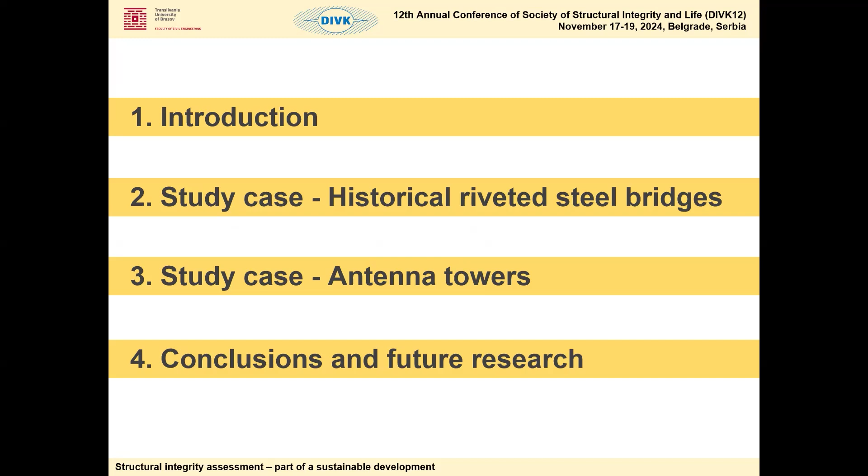First, I will present a very short introduction with some elements regarding sustainability, some cases of damages, especially for bridges, and then two study cases where I will underline the algorithm that I will be presenting, and in the end, some conclusions and further research.

As the definition of sustainable development given by the United Nations report from 1987 states, sustainable development is an approach to growth and human development that aims to meet the needs of the present without compromising the ability of future generations to meet their own needs. So it's very important to understand that we need this sustainable approach, taking into account three elements.

So again, it's about control. You need to have the environmental aspect, the economic, and the social aspects together, put into one sustainable development.

Some researchers will consider that sustainable development is an oxymoron, like it's not sustainable, since any development should not be sustainable by its nature. So it cannot be sustainable.

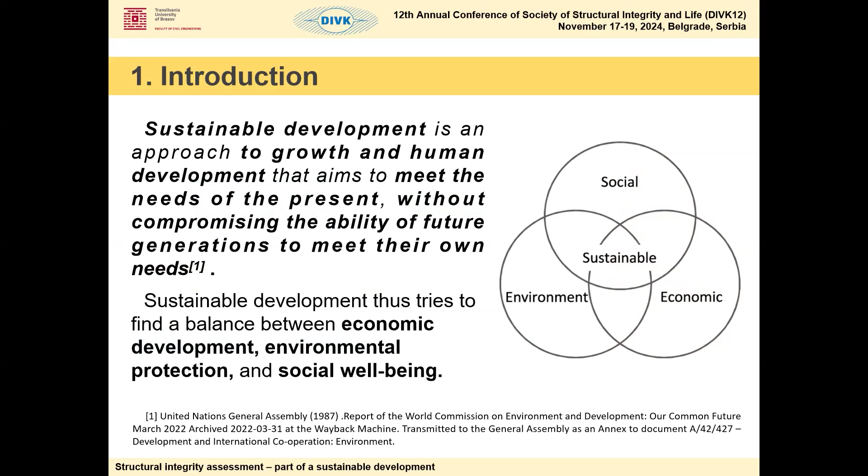But again, I will emphasize why we need this approach in civil engineering especially. So, taking the existing structures, we need to assess the reliability of these structures in order to see if we can reuse them, or if not, we can adopt the demolition solution.

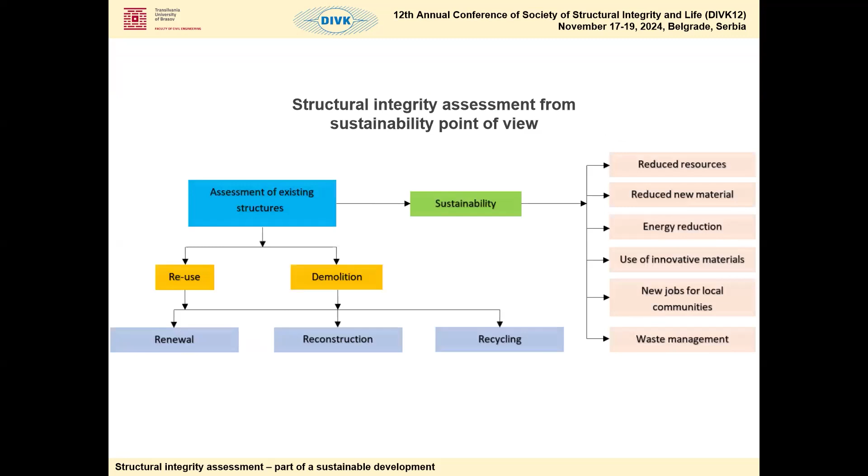Of course, in the end, we also have the renewal aspect - sorry, the reconstruction and then recycling. I think I will pass to the next part.

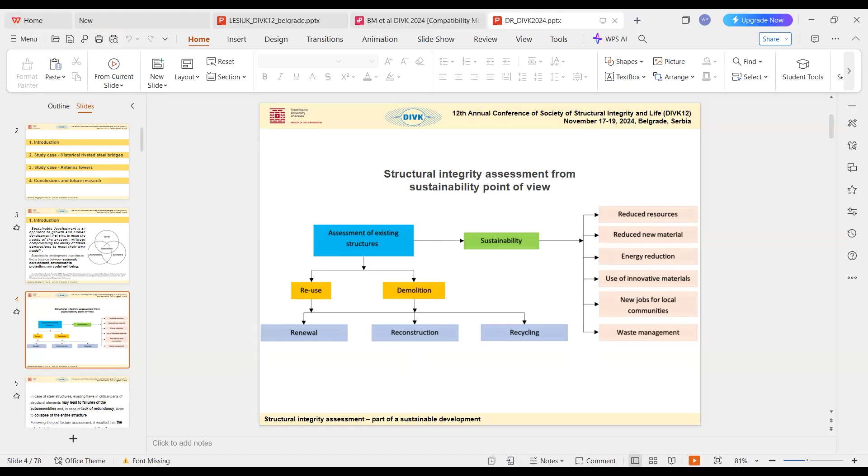Sorry, I think it's a problem. I will put it the PDF. This is better. Sorry for interrupting. Confidential? No, it's not confidential. You go here and it will go to the system. Perfect. Thank you. Okay, so we are here.

Okay, sorry for interrupting. As I mentioned, we need to consider this aspect of sustainability. So we need to assess the structures in order to see if they are reliable, and we need an approach given by fracture mechanics.

So we need to do an engineering critical assessment of the existing structures, and we need to find an algorithm that we can use with existing structures. First, and secondly, why not consider from the designing phase the possible implications of flaws that might be discovered in the future through visual inspection of the structure? We'll see why I'm considering this aspect.

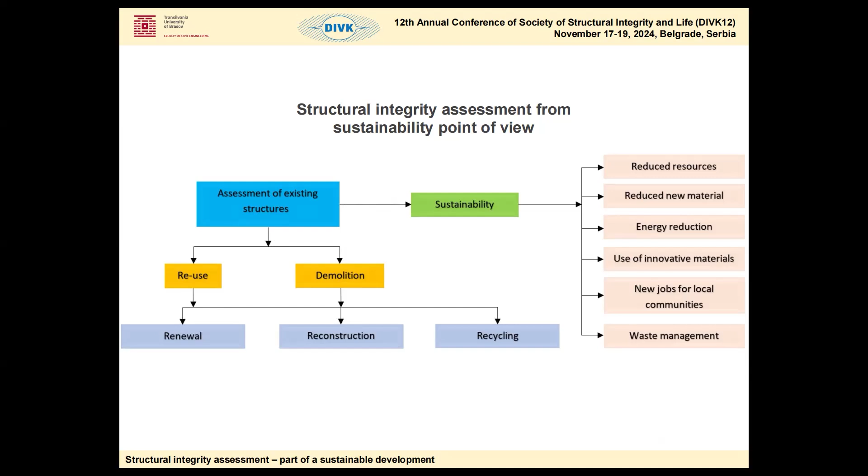So we need to assess this. Some examples of structures that have failed due to lack of inspection, especially corrosion problems.

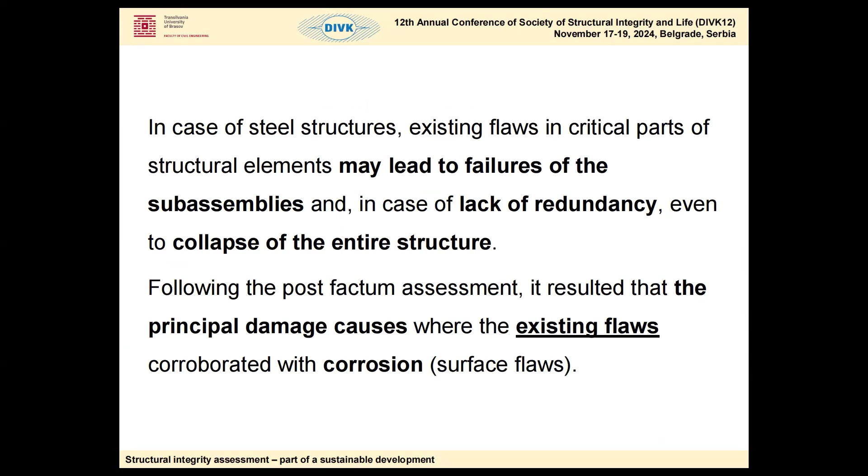Some examples here - it was not working, the PDF version. So we have an example of the Minneapolis bridge over the Mississippi River, collapsed August 1st, 2007. The main principal cause was poor maintenance and the problem of structural integrity of the support of the piers. As we can see, there are some indications of possible causes - the joints were under-designed.

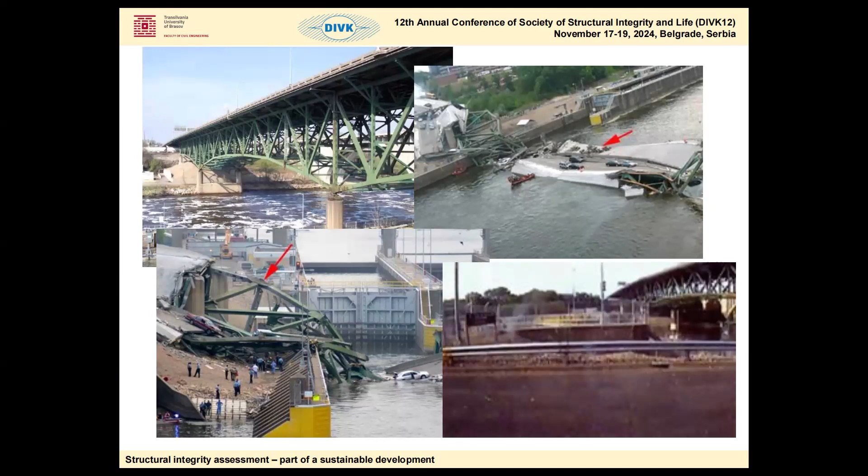Another example, the Nanfang'ao Bridge from Taiwan, a 140 meter span bridge. Again, lack of maintenance, lack of inspection. The tension rods were corroded and the bridge collapsed. We are talking about a 20-year-old bridge, collapsed in 2019.

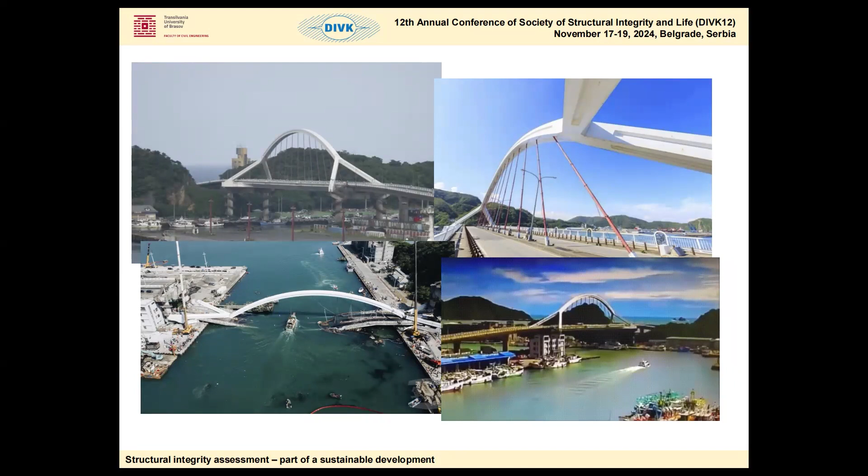It happened in 2019, so it was a 20-year-old bridge. And another example, some wind farms, wind turbines from Germany, 2017, again collapsed due to the crack and the buckling of the entire structure.

So we can see that we are having a lot of low cycle and high cycle fatigue structures that are damaged due to the problem of bad maintenance, especially, and lack of inspection.

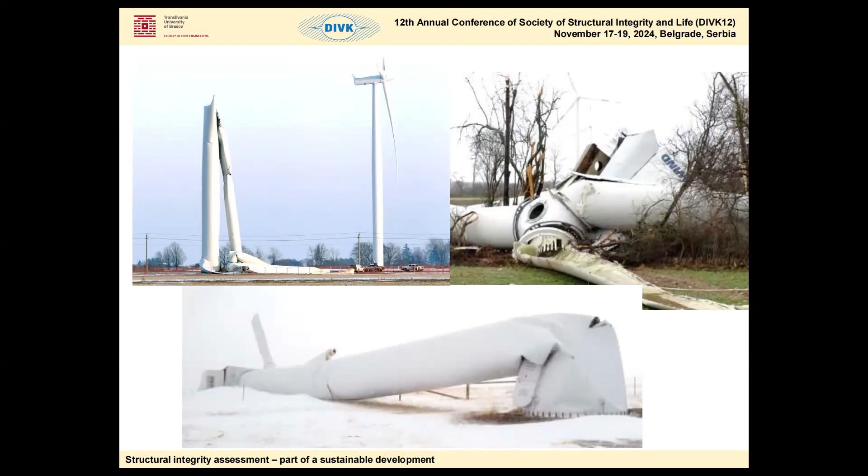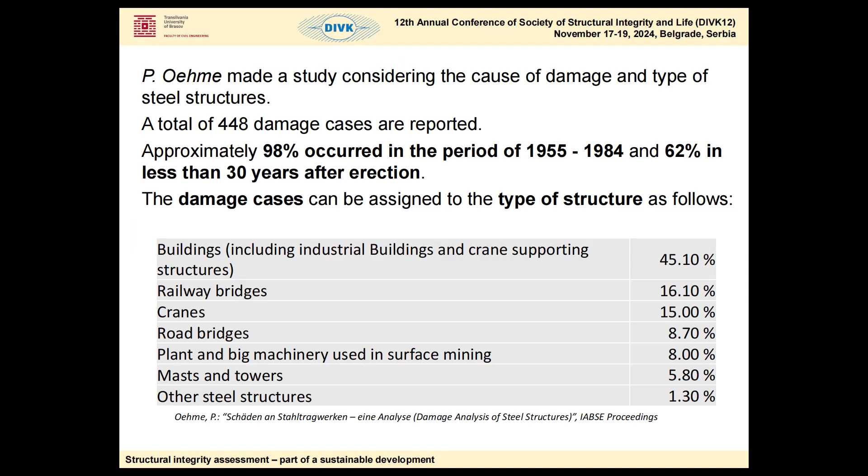This leads to the collapse. So Peter Oehme, a professor from Dresden University, made some kind of report of damages of structures, and he documented over 400 cases. In the end, he reached the conclusion that fatigue is the third in place from causing the damage, the collapsing of the structure.

As one can see, in case of bridges, it is the first in place to be the damage cause of the structure. So bridges, I will give also some examples about these structures.

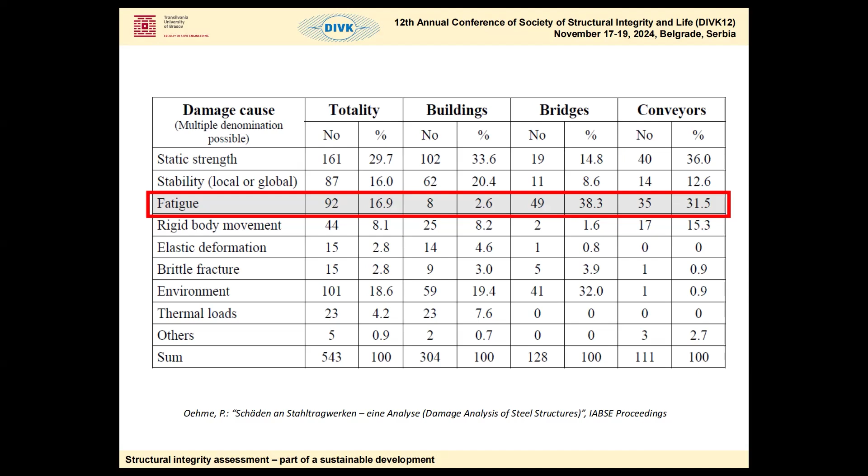So we will need to think of a solution, very simple to be applied by civil engineers. Civil engineers are not mechanical engineers. They need to have some kind of standard, the normative. We will need to have an algorithm for them to use in order to assess and then to make a decision upon a structure.

This slide is very concluded because in a way you can see our approach as civil engineering. We are not having, as in mechanical engineering applications, the defect as input data. So we are discovering the defects when we are assessing the structure, when we are visualizing.

So we are going to have a visual inspection. The defect afterwards can be revealed, and of course it's a problem because you have to take time to assess it and then to see the implication of that defect.

So maybe a different approach, an approach coming also from sustainability development, in order to have this defect as, let's say, a first input for the structure itself.

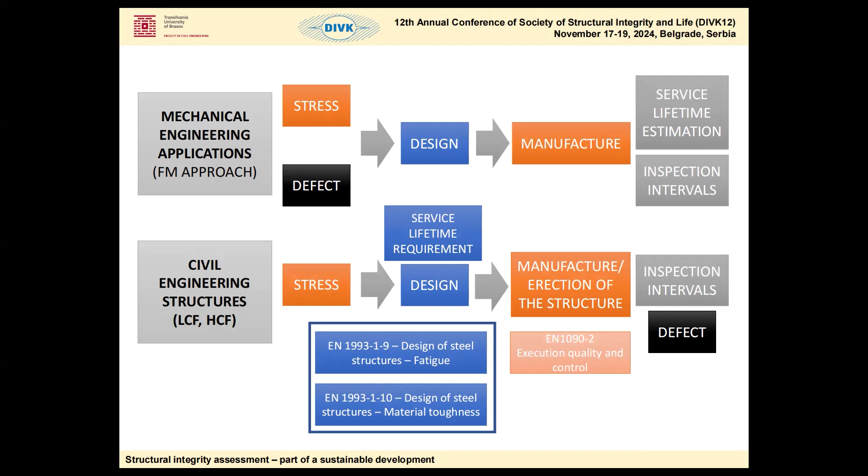But as Professor Filippo Berto told, at this moment, these provisions are maybe over conservative, and some of them are not enough for us as civil engineering to use.

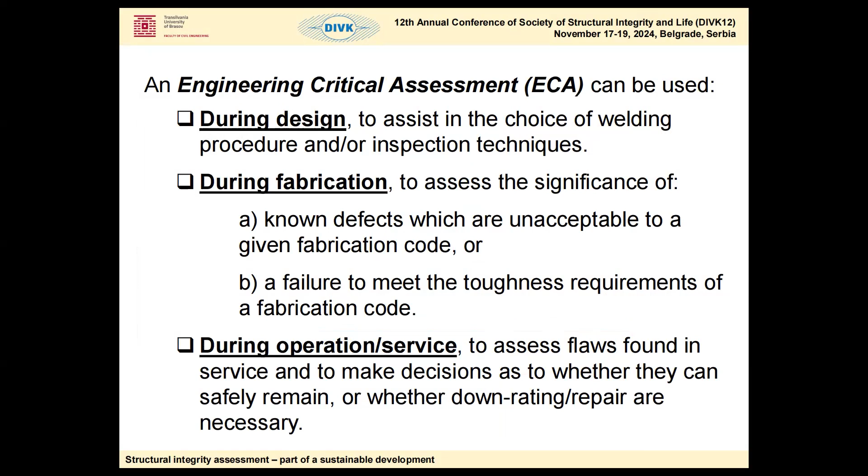So we need to apply, and we can apply this immediately, this engineering critical assessment procedure, which can be done during designing or during fabrication, or afterwards, as I said, during operation in service after visual inspection, maybe when a defect can be seen. So we can adopt the repairing procedure as over conservative, or we can consider this approach

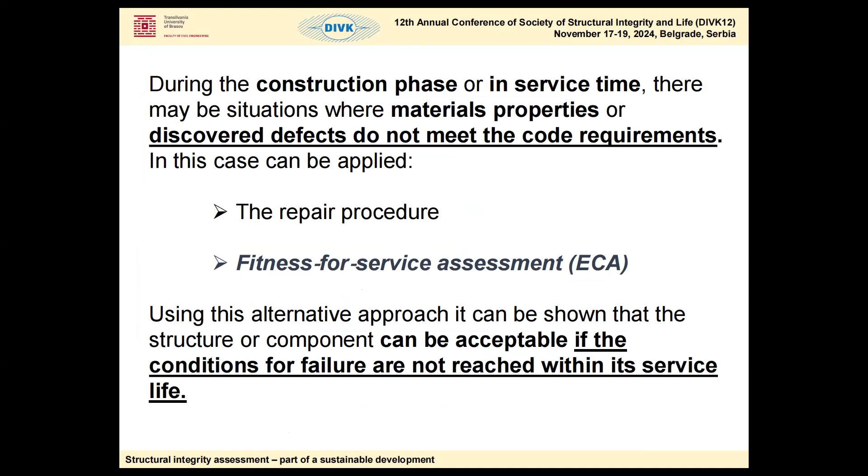as engineering critical assessment applied in the civil engineering application.

So of course, in the end, we can conclude that the structure is safe, or it can be inspected, and then it can be considered safe unless other cracks appear, or the crack will have extended, or maybe other defects appear. Or repairing is mandatory, that means it is needed to intervene.

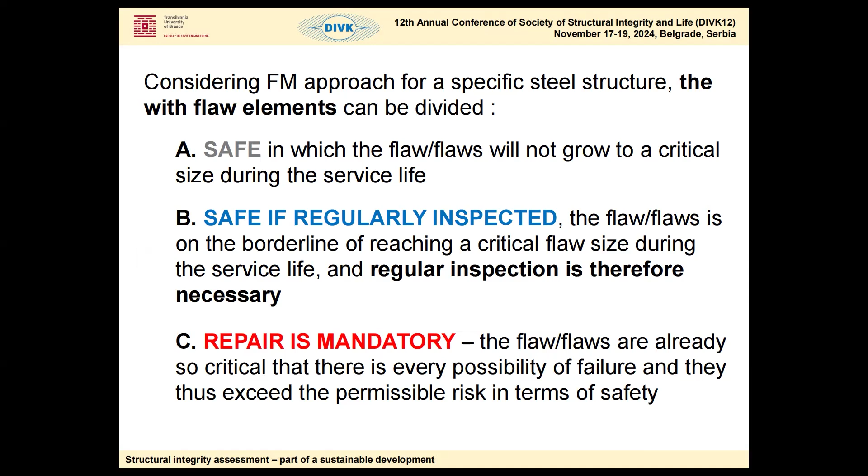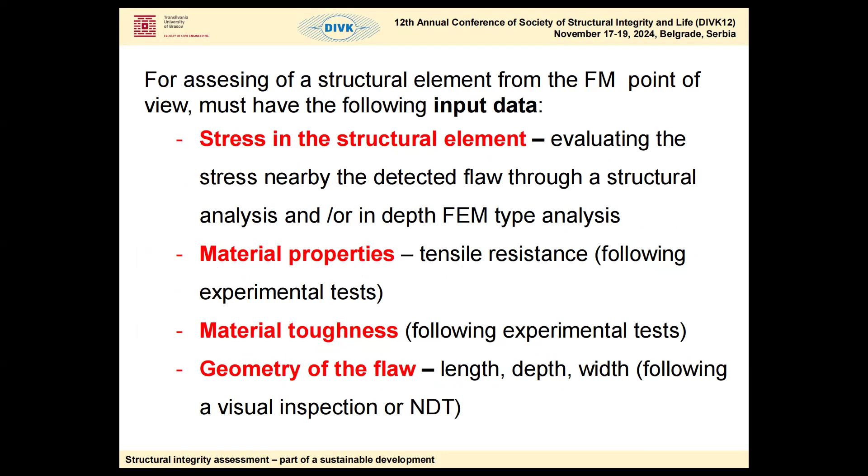What we need, what are the input data? So we need the structural stress in the structural element. We need the material properties, tensile resistance. We need the fracture toughness, of course, and we need the geometry of the flaw.

As the phases, we will have the load range, we will have the applying fracture mechanics, determining the fracture mechanical properties, and we will need to somehow categorize the flaw. We will see immediately determining the crack limit.

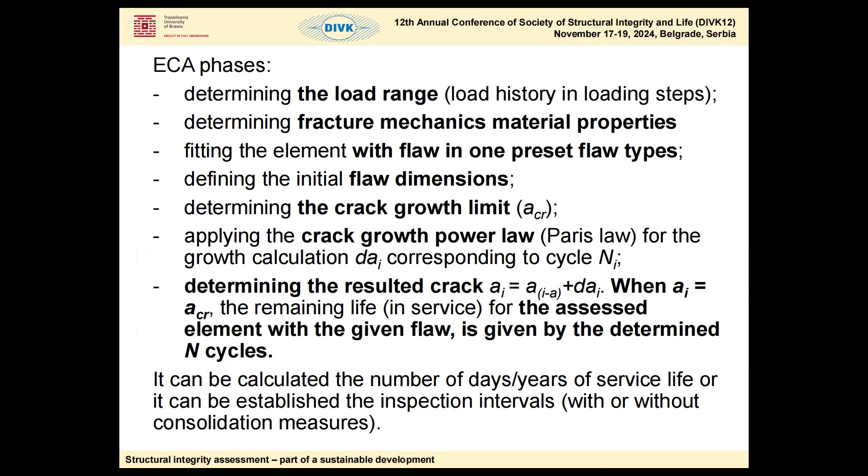If we go further with the fatigue, then we need to see the Paris crack growth power, and in the end, applying several cycles in order for the crack to expand.

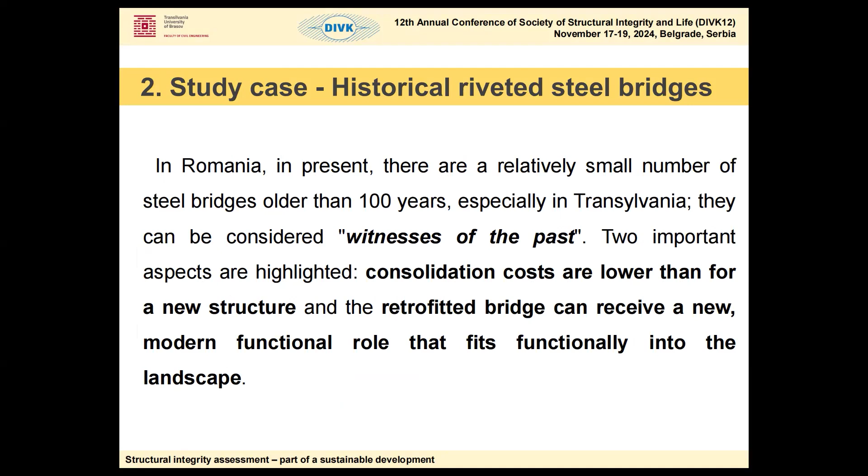I will show two cases. First, a historical steel riveted bridge. I will emphasize that in Romania there are several bridges which are more than 100 years old. They can be considered witnesses of the past because, of course, we need to present them as structures that passed through time.

And I will present some phases of this assessment. First, we will need to have the structural analysis of the existing bridge, then we will see a retrofitting proposal, again, a sustainability approach.

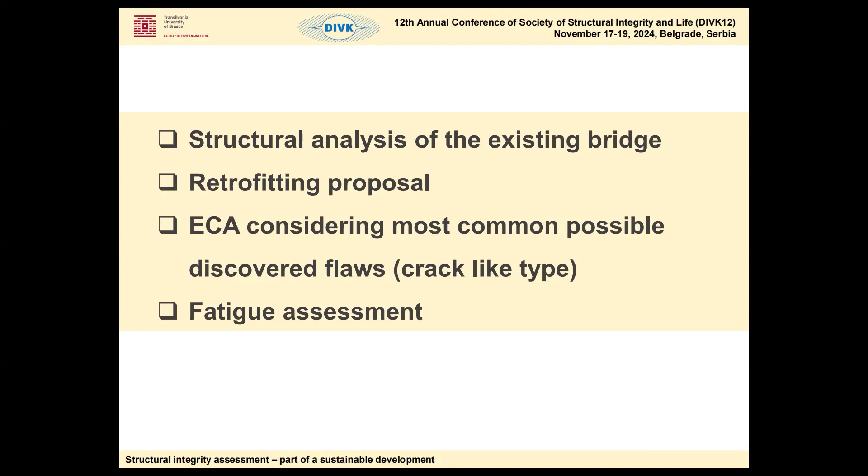Engineering critical assessment considering the most common possible discovered flaw, and the fatigue assessment. As mentioned before, as civil engineers we like things as simple as possible, and to have provisions and standards in order to address a problem and have a solution.

So when you have an existing bridge, you need to address, let's say, four phases more or less. First, we need a general checking of the fatigue, which is very common and over-conservative, let's say, a procedure dealing with the stress range. If this passes, okay, the bridge is okay.

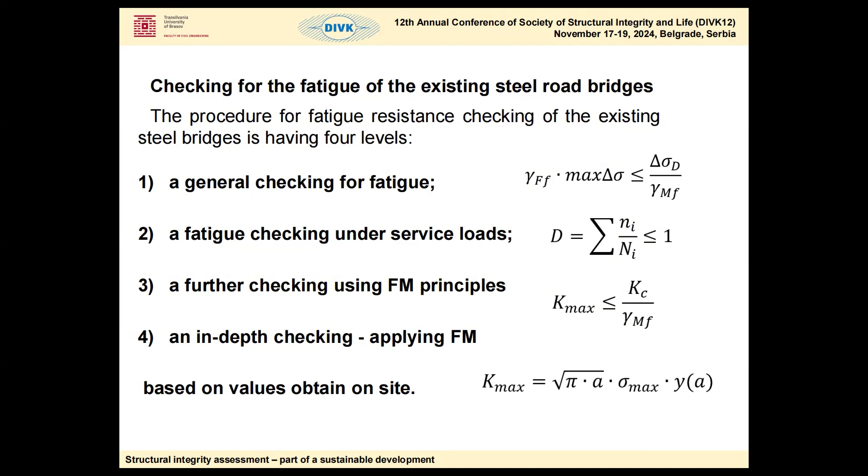We will need the second approach if this over-conservative check is not passed. Another procedure is to apply the damage accumulation principle, found in the Palmgren-Miner rule. And then if not, we'll need to apply fracture mechanics principles.

But again, what about this situation with the bridges in Romania? We need to understand first that Romania was one of the first European countries where the steel industry produced steel, in the 18th century. We should also emphasize that the bridges were riveted at that time.

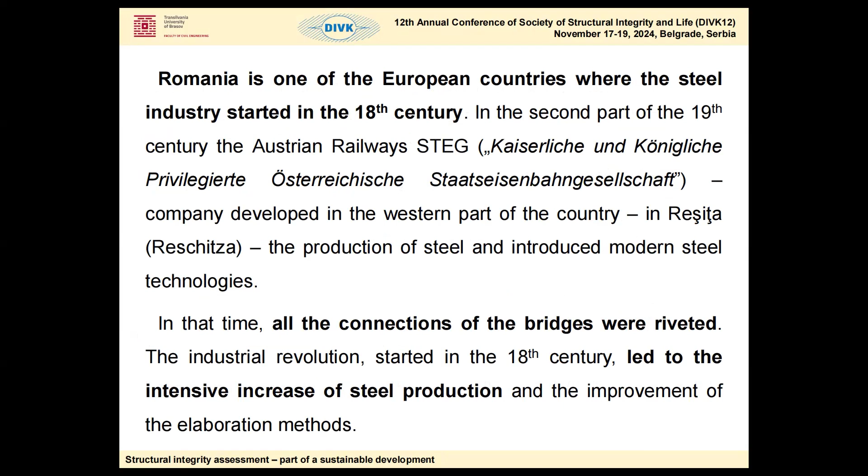At the end of the 19th century, we had around 2,000 tons. At the beginning of the 20th century, we had almost 4,000 tons of steel bridges produced in Romania, because part of Romania was also from the Hungarian Empire.

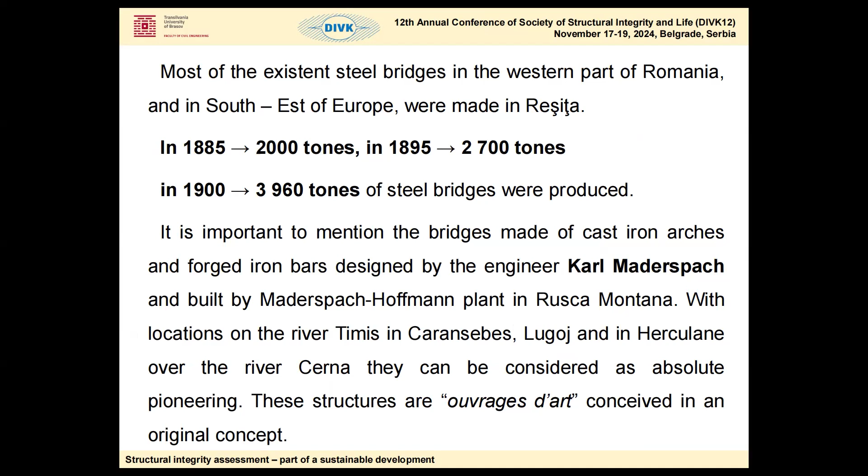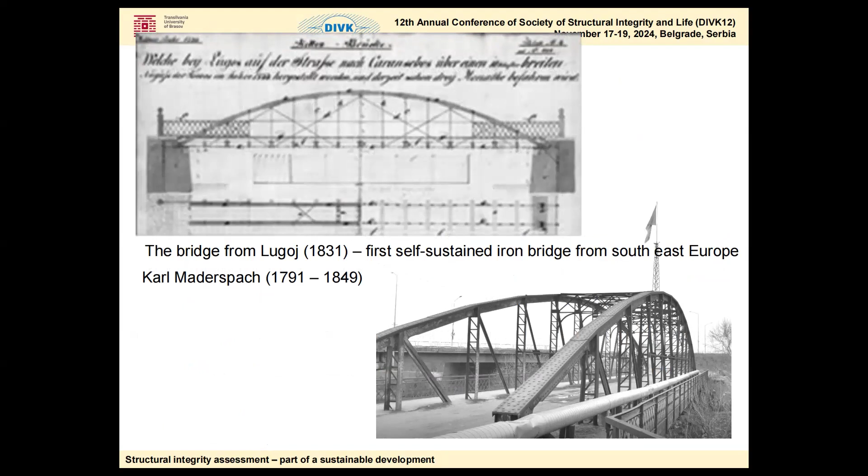I will underline that Karl Maderspach was also an engineer who designed very nice bridges in the western part of Romania, in the Timișoara region, and Lugoj as well. You can see some of his achievements and existing bridges that are still in operation today. These are from the western part.

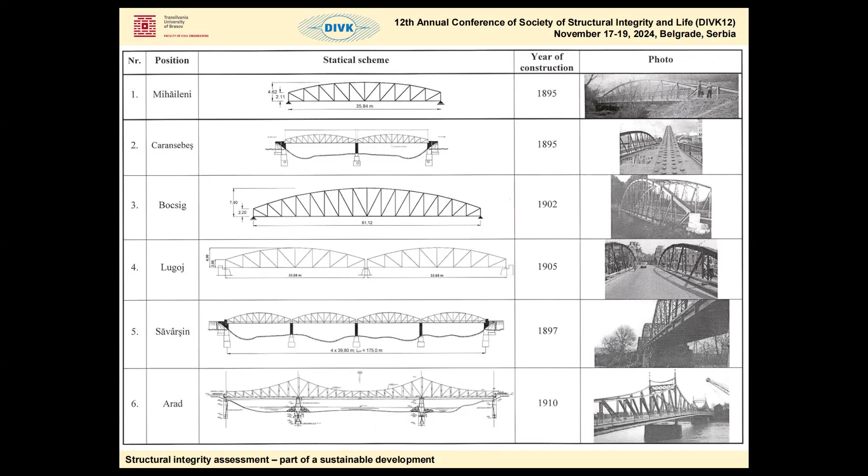I will talk about just one slide on Săvârșin, the fifth in row, the Săvârșin bridge over the Mureș River. This is a bridge that was consolidated in...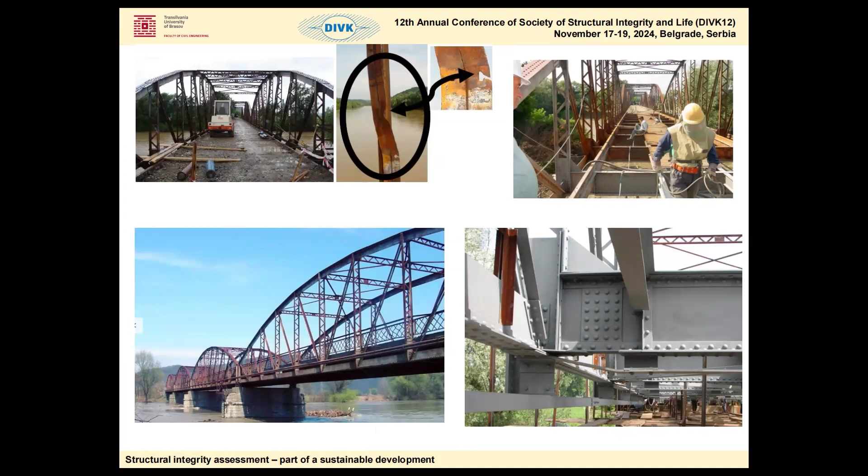2009, and in 2010 this project obtained a prize from the European Convention for Constructional Steelwork. So it is a very nice and good project for Professor Băncilă of Timișoara Polytechnic University.

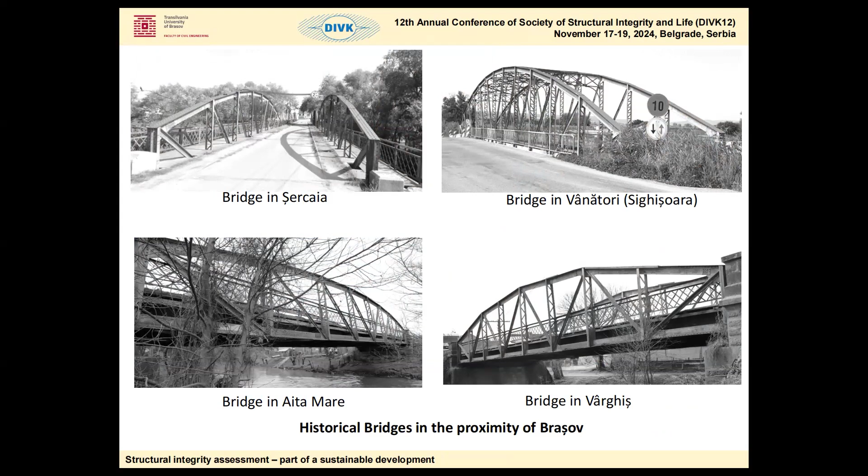From the point of view of the bridges nearby Brasov in the Transylvania region, I chose four of these bridges. We assessed all these bridges and tried to adopt solutions for, let's say, retrofitting. We'll see this immediately, and see the actual situation assessed by means of this algorithm that I will show.

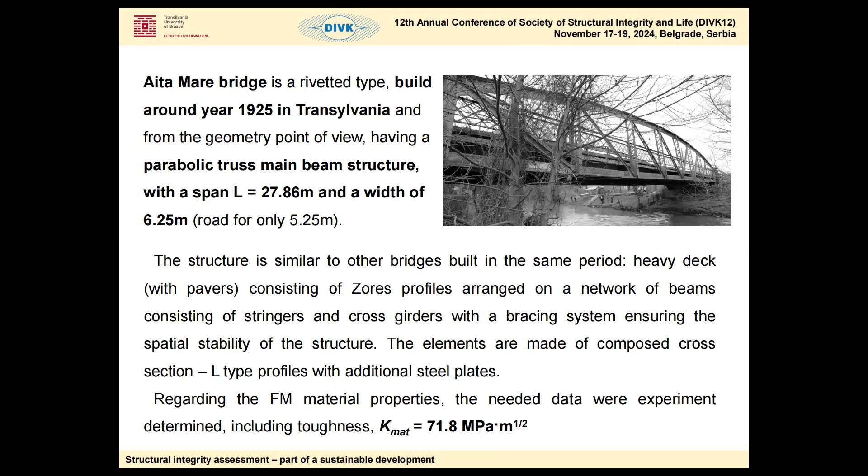One of the bridges is the Aita Mare Bridge. Very short—I won't have time to present the geometry—it has a 27 meter span, not a long span bridge. Some of the details show compound cross sections, also for the deck.

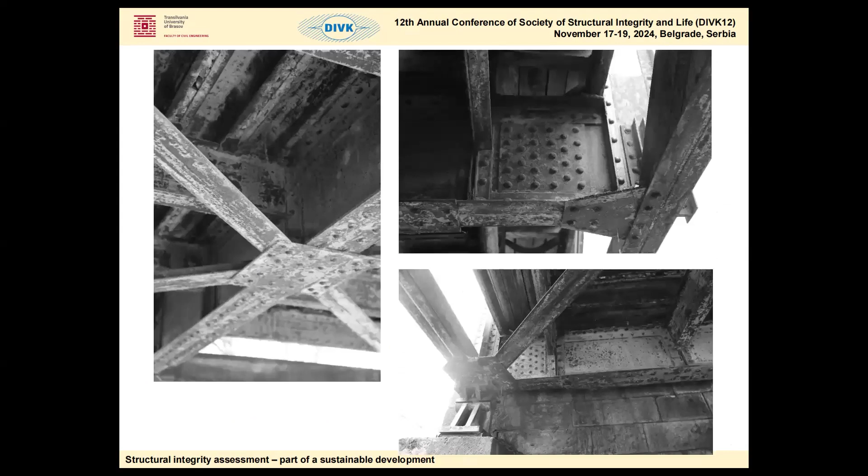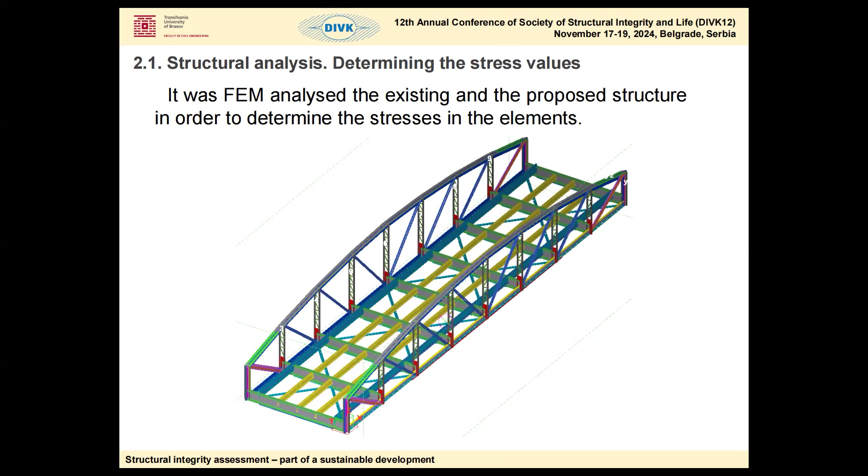The degradation was high, let's say, because of the corrosion and infiltration coming up from the deck, the water infiltration. So we need to assess if the bridge is workable and has the ability to sustain the loads. We've done finite element modeling analysis, and in the end we propose a solution for retrofitting.

Why not? Because it was a sustainable solution. So instead of demolishing the bridge, we discussed with the local authorities to have it retrofitted. We propose a solution to cut the bridge in two, as one can see here, and put in place a new beam.

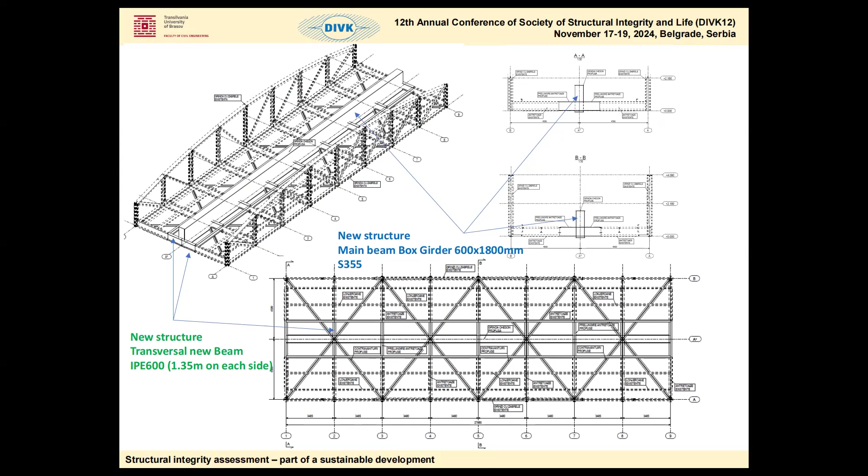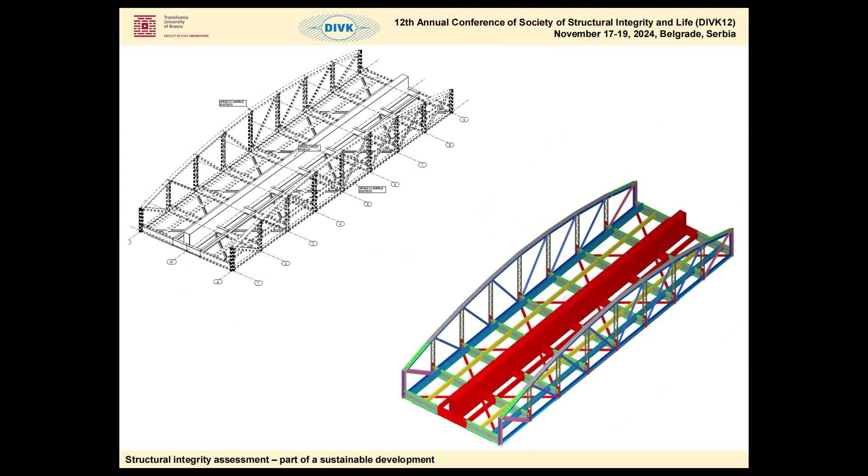It's a girder, a box girder, which will sustain part of the loading. I should emphasize that the new bridge was designed for new Eurocode loading, so of course it's adapted to the new mobile loading. Some views from the structural analysis, and in the end, the stresses from the finite element modeling.

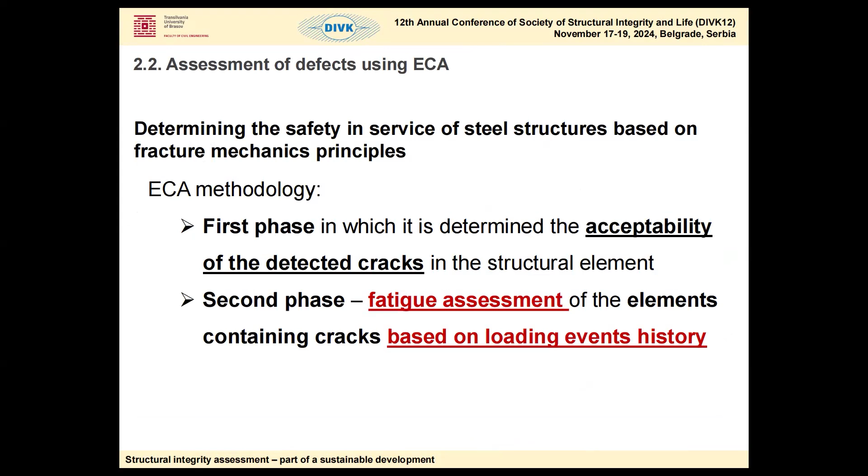We applied engineering critical assessment in order to see the implications of a possible discovered flaw. We tried to classify these flaws according to British Standard 7910, and in the end we applied the failure assessment diagram procedure.

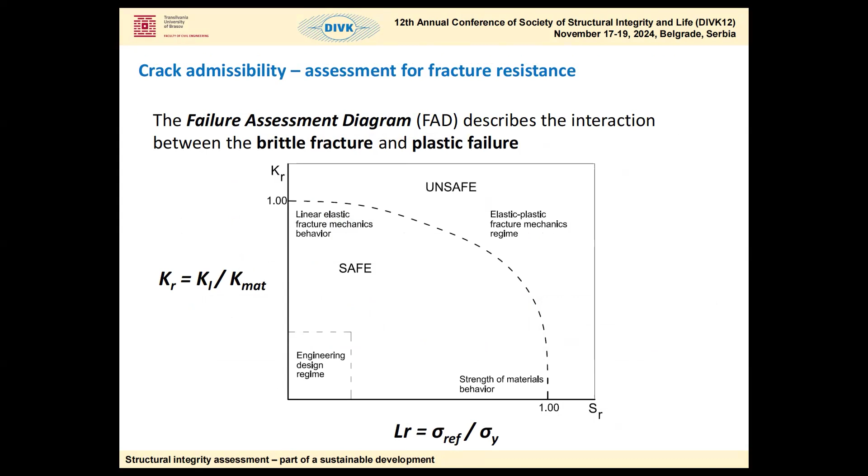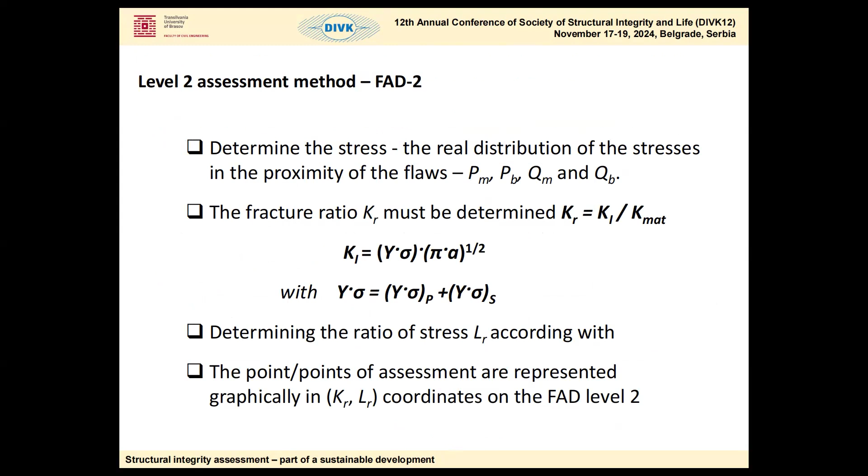Just a few things about failure assessment diagrams: we need to address the fracture toughness and, of course, the specific tension from the LR and KR axis. In the end, introducing the types of flaw assessed: the through thickness flaw, surface flaw, long surface flaw, and buried flaw.

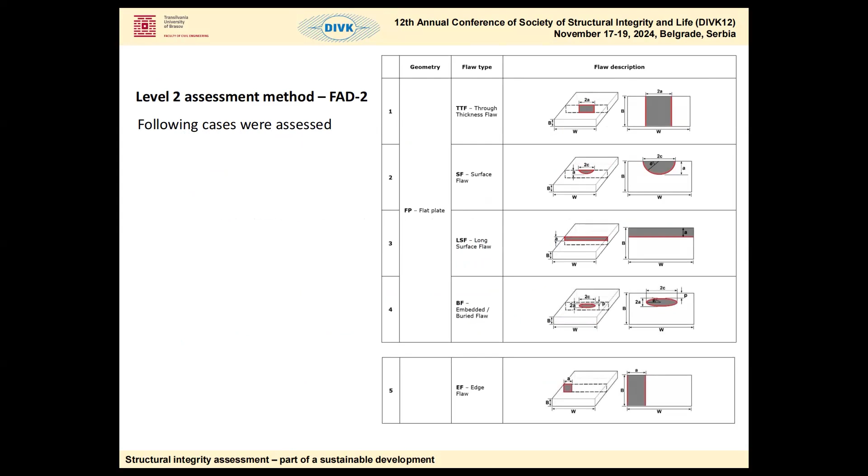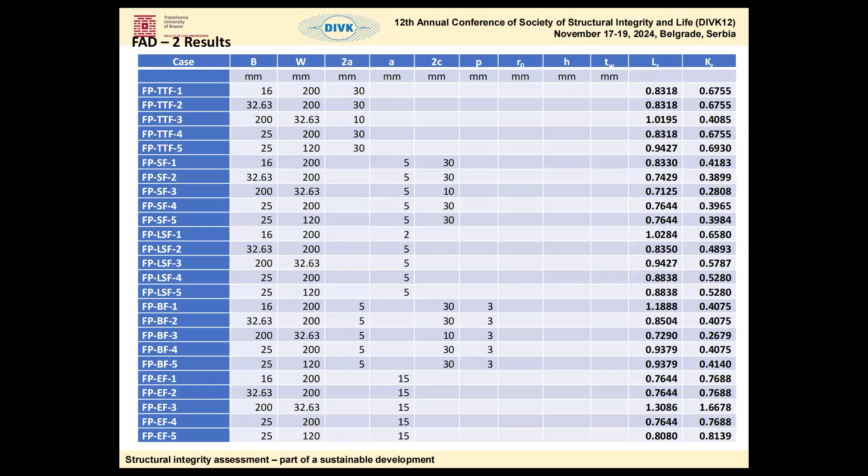These are the possible locations of these flaws in the main truss, in the deck, right nearby the rivet also, and the results. This is the tabular form, but here we can see the failure assessment diagrams more in depth. We can investigate, maybe in a conservative way, the implication of the existing flaws.

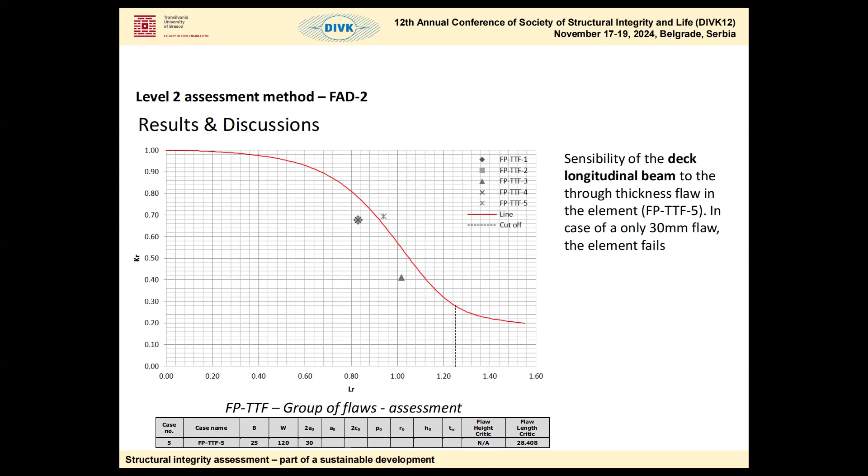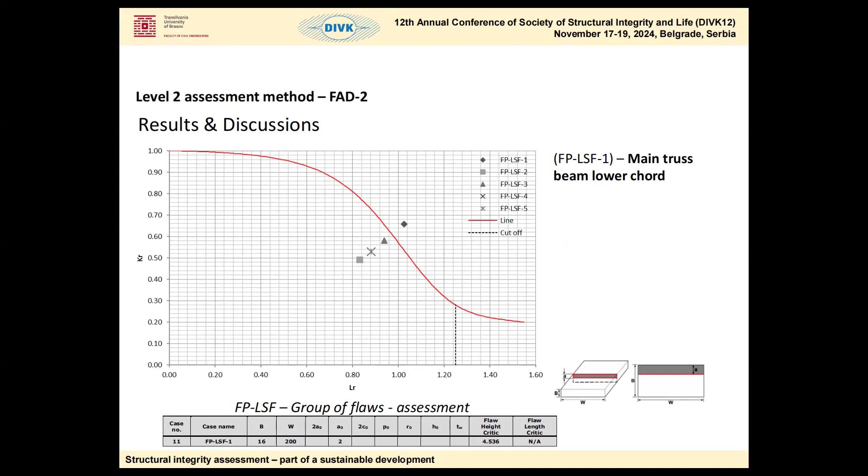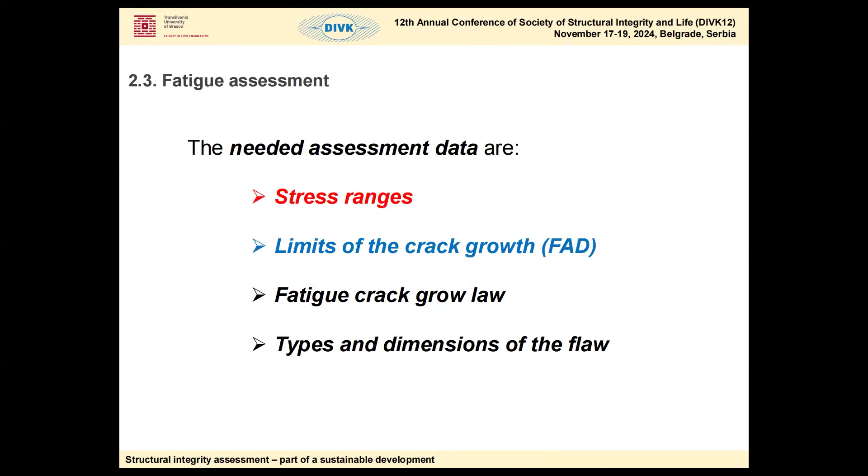So the flaws, the points that are outside the assessment line, can of course lead to a problem in that element. Several cases were assessed. These are the results, and in the end, we need to assess the structure to see if it's reliable, considering the fatigue loading. So we need to establish a spectrum for loading, applying Weibull distribution.

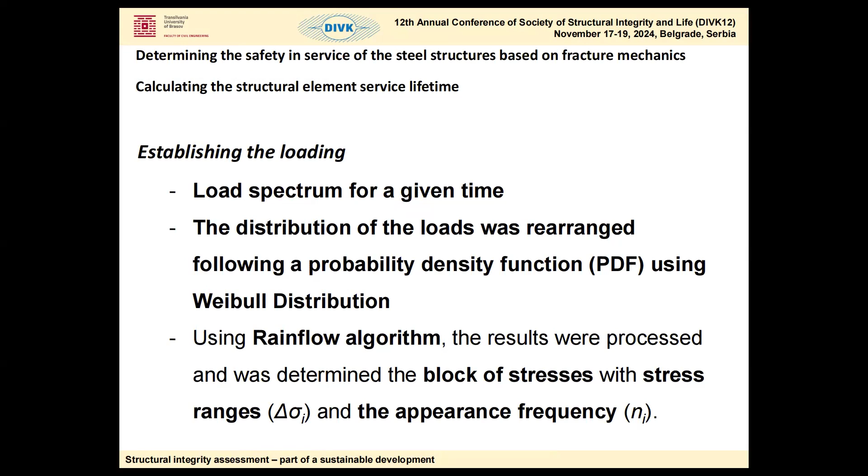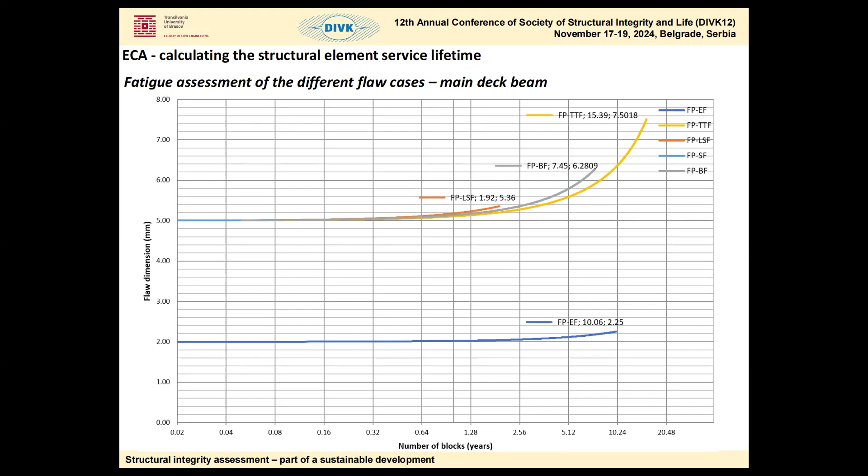In the end, we assess 5 types of flaws, shown here as the implication of each flaw: the crack growth, the flaw dimension for each type of flaw, and the number of blocks, which means number of years. For example, a long surface flaw is normal to have 1.92 years, but we can see also the buried flaw that is problematic. So in this way, we can assess very well the reliability of an existing structure.

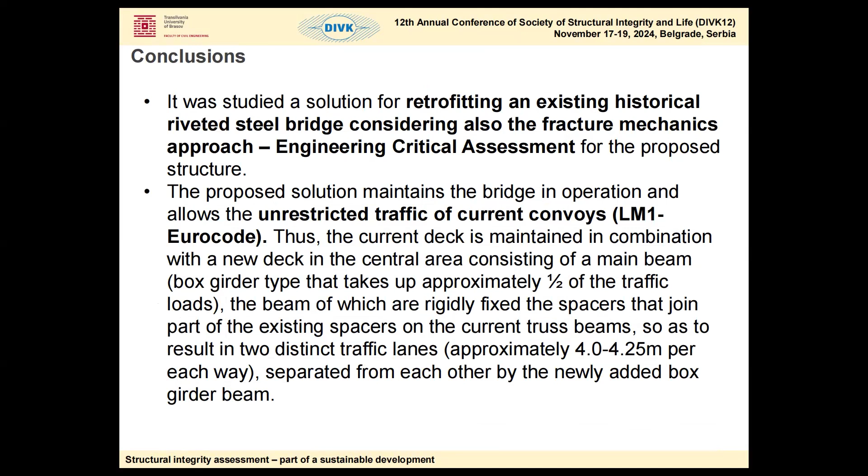Just a short conclusion for this part: engineering critical assessment was applied, giving new life for an existing bridge. That's very important. Very shortly, because I think I'm out of time already.

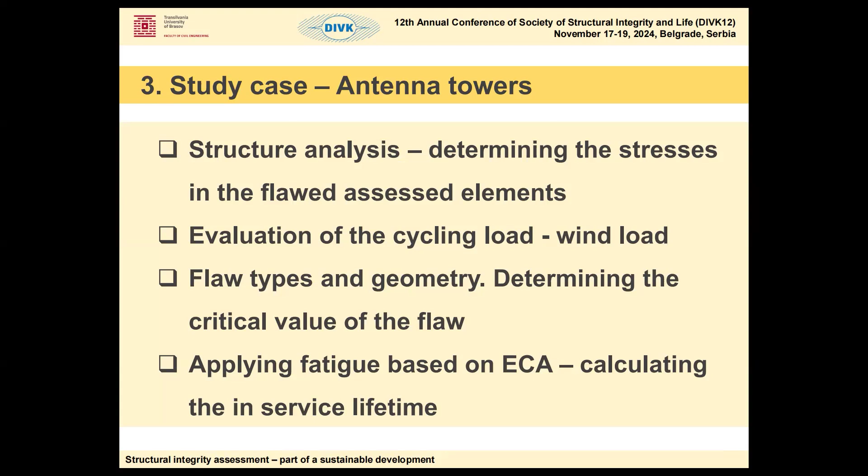Sorry. Antenna towers, another project that was done. Both projects again were done in collaboration with the Innovation Center with Professor Sedmak. We tried to investigate the implication of the wind loading on existing...

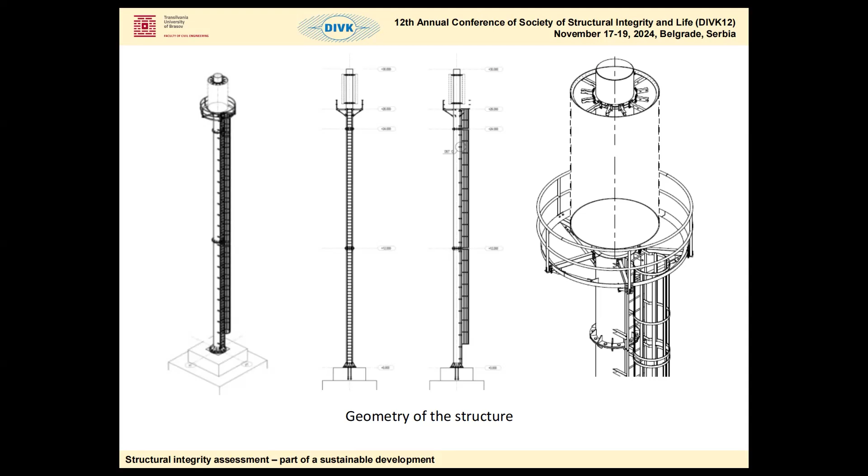...monopole type antenna towers for communication especially. There were a large number of towers designed to be erected, to be manufactured for a company in Romania - 15 pieces. Considering the height, 40 meters, we need to investigate the possible implications of the discovered flaws in this structure.

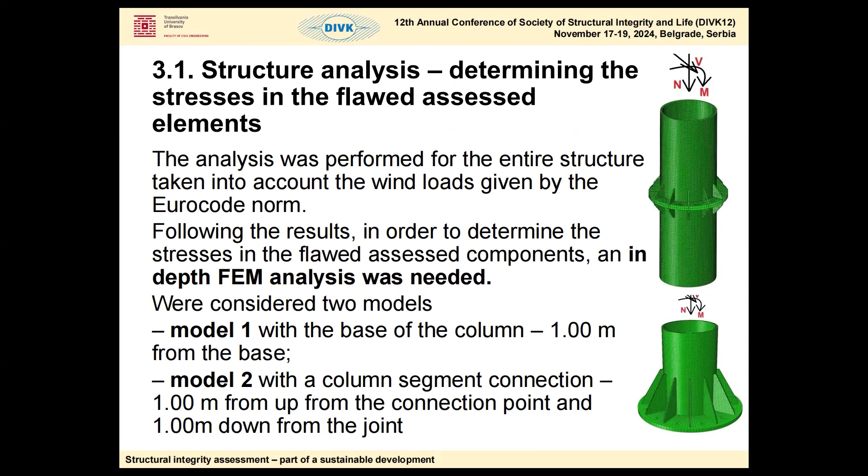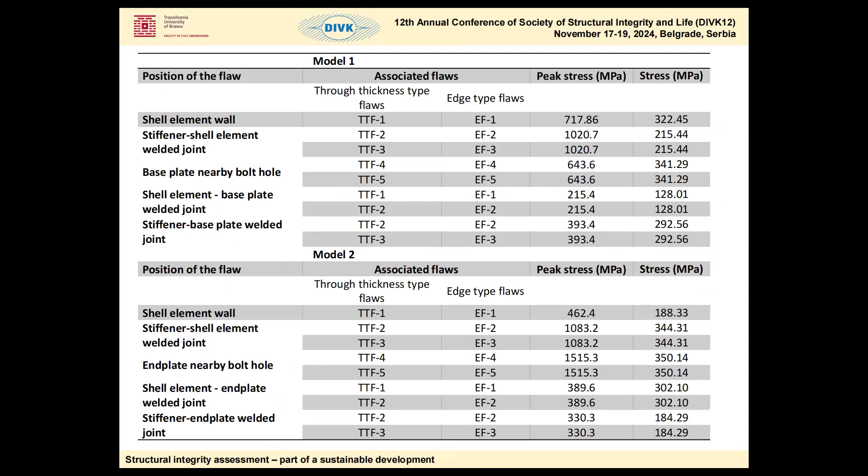So again, the same procedure was applied. This was much more simple because we had a new structure and could foresee the weakest points. The weakest points are at the joints, at the base, and where the segments were connected. In the end, for each model the maximum stresses were determined first.

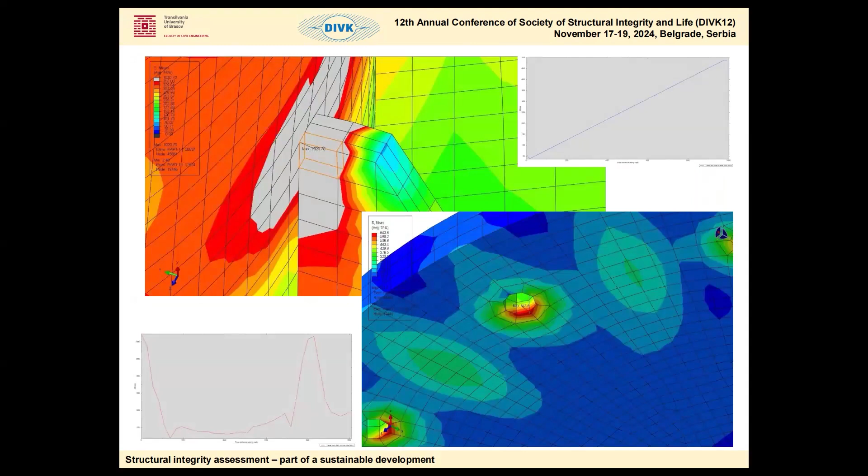These are the nice images from the final modeling. Usually these images capture the audience. In the end, we need to assess the wind load because we need the fatigue loading, so we need the nominal stress ranges.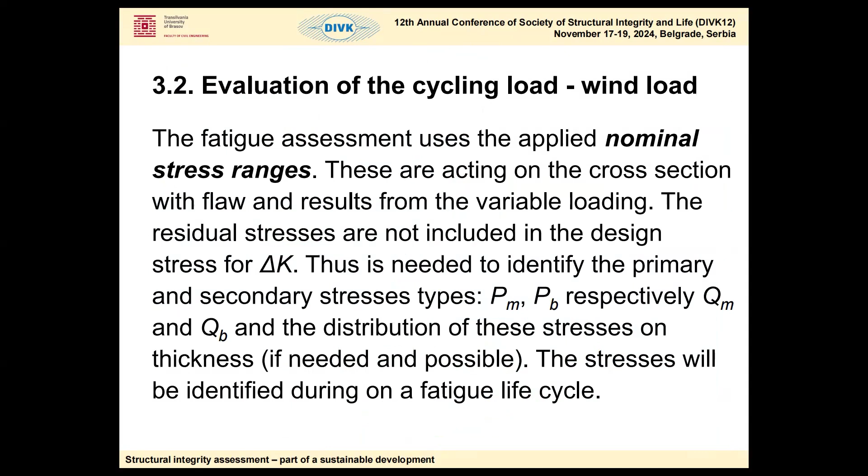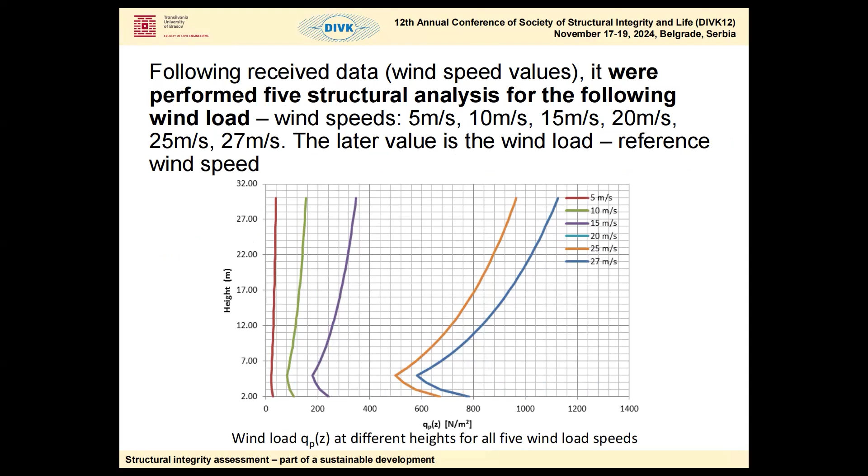This came from the National Institute of Meteorology and Hydrology from Romania, and we obtained the results. In the end, we had this spectrum, which needed to be interpreted considering the delta sigma, so we need different structural analysis for different wind loads. Using Weibull distribution, we ended up having the number of blocks, the stress ranges, and the frequency of it.

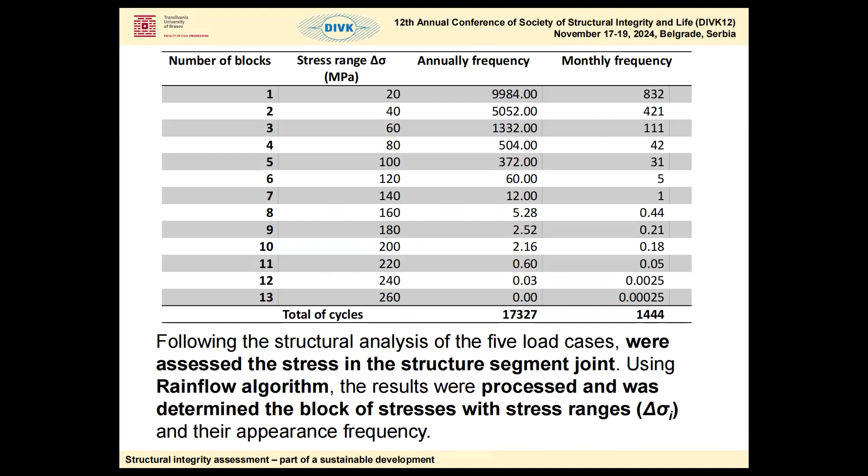In the end, just to skip to this, we have the results - very nicely presented results where we can see the flaw dimension and the number of years the structure can be without problems, or where we have the most critical defects.

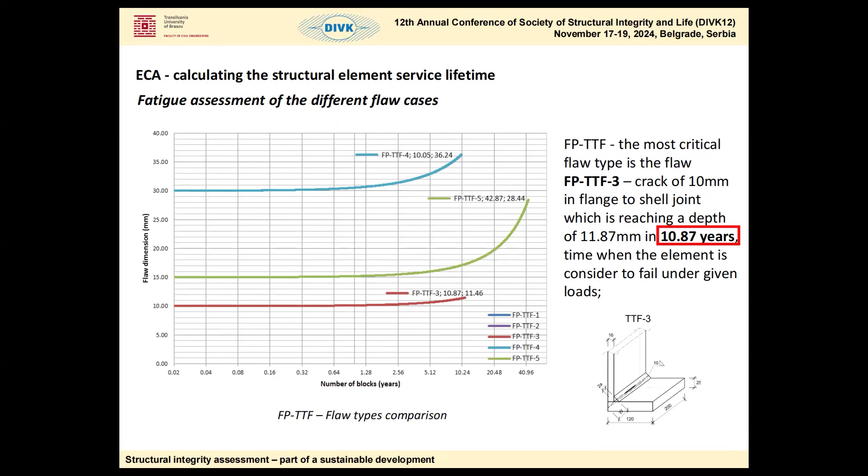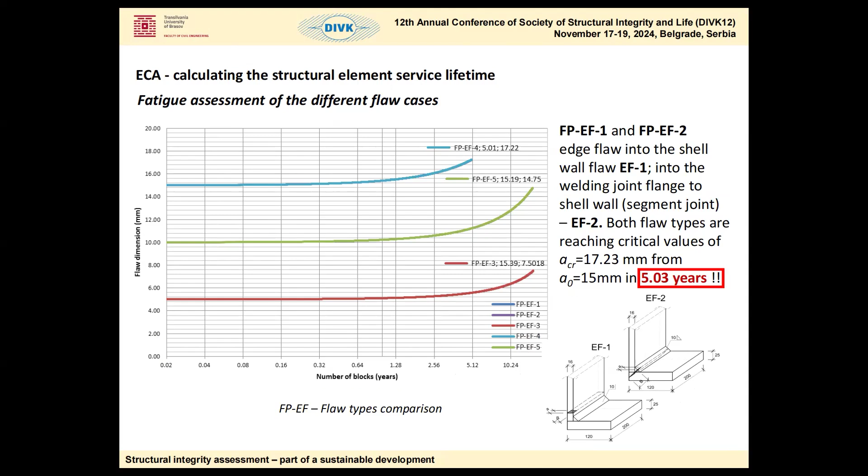We can see here through-thickness flaw type, crack in the welding for example, or edge flaw type, the implication - the in-service lifetime is 5 years. Of course these are conservative results, but in civil engineering we do like conservative results because we must rely on something. We don't like over-conservative, but we like conservative.

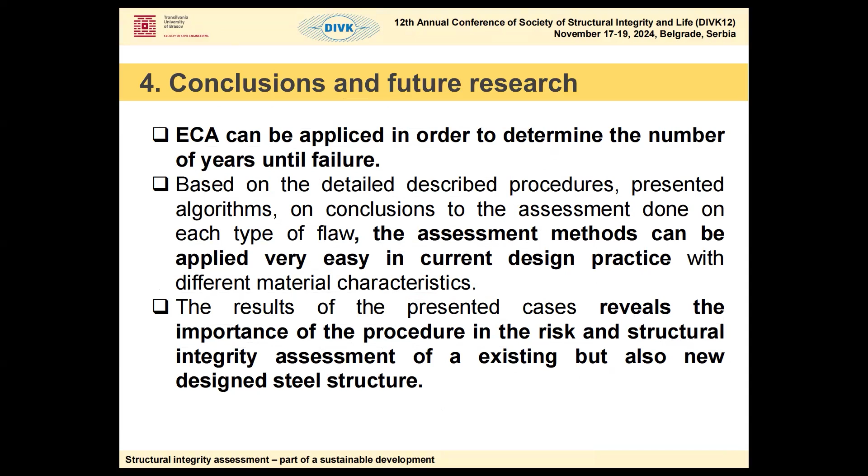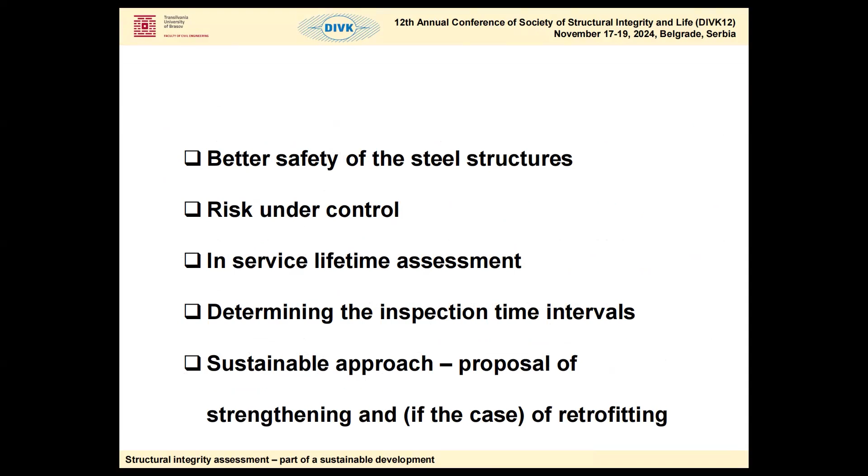Some conclusions: engineering critical assessment can be applied to determine the number of years until failure. We need to emphasize the importance of this considering the risk and risk control. But we also need to emphasize the sustainability approach, proposal of strengthening if possible, and in some cases, retrofitting.